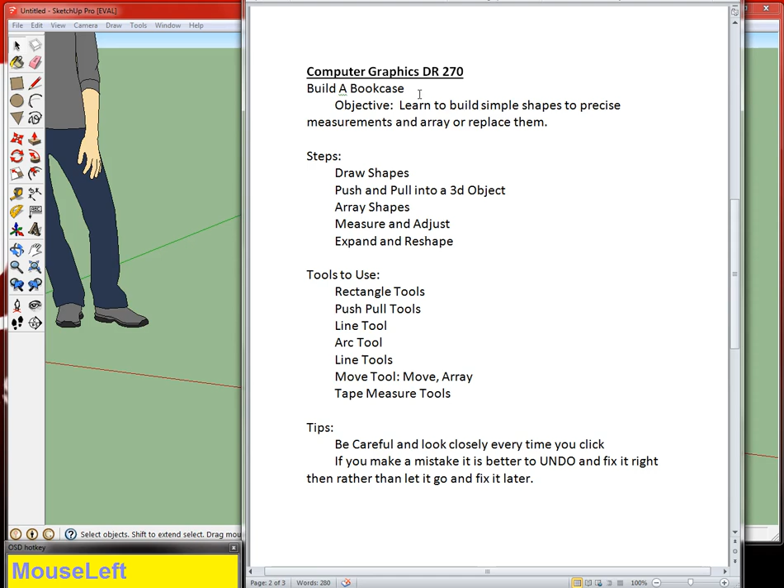So let's get started. You're going to start with the rectangle tool and you're going to make the base of the bookshelf from the Blythe Spirit Drafting, which is 2 foot 6 inches by 9 inches. We're going to use the push-pull tool to pull this to 7 feet tall. Okay? So now we have the basic shell of our bookshelf.

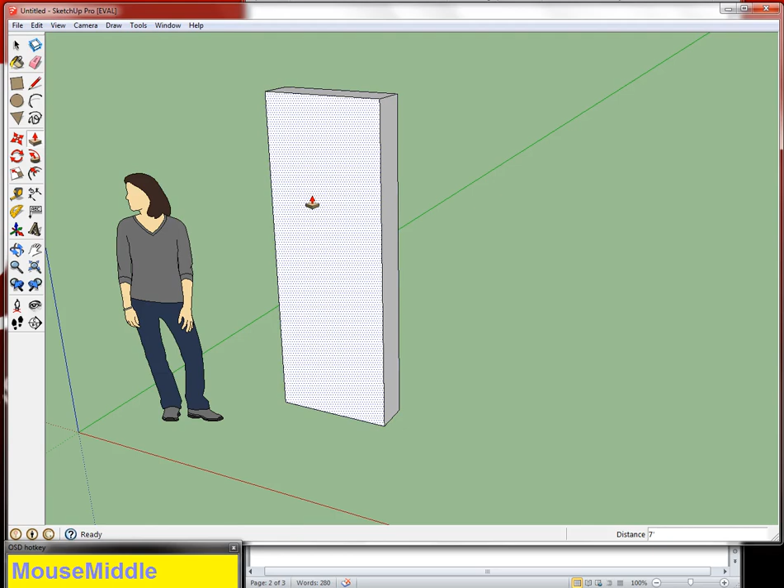We're going to take out one side. Grab your selection tool, and to do that also just tap the space bar. Select one click so that you're just selecting the surface. If you double click, oops, that was a triple. If you double click, you're gonna get the surface and the edges. If you single click, you'll get just the surface. Double, surface and edges. Triple, the surface, edges, and everything that geometry touches.

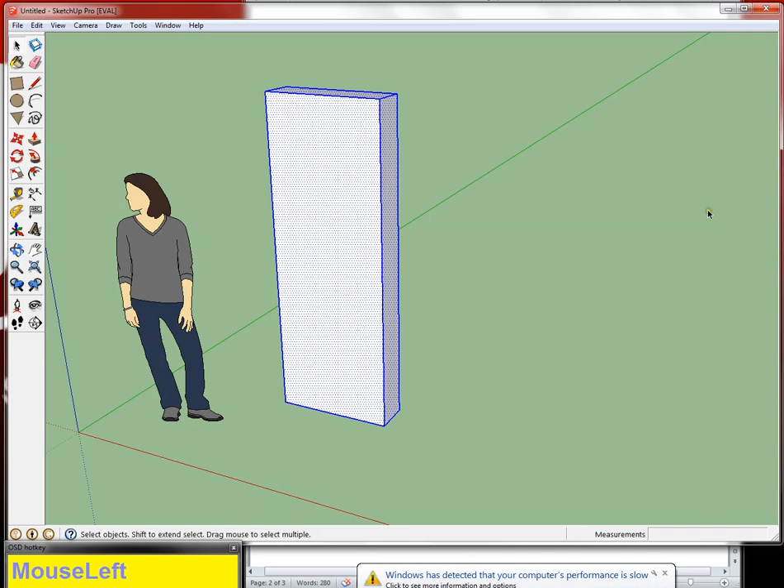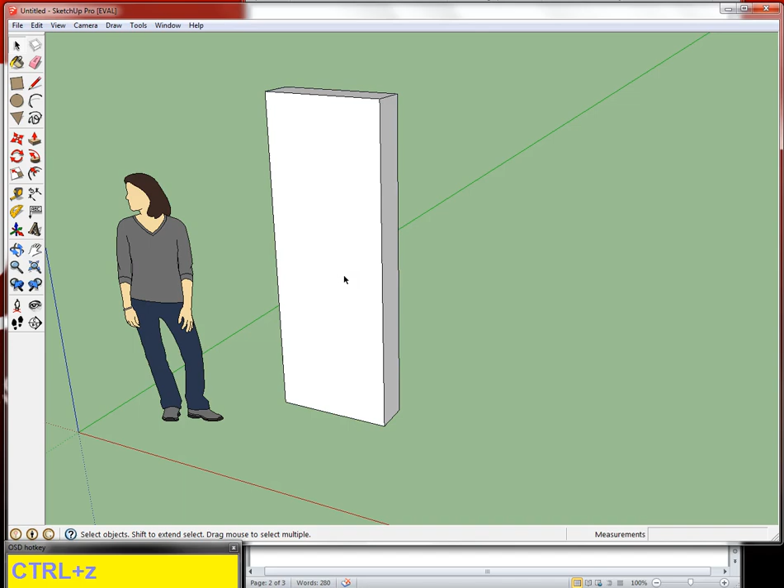That includes if you build 5 different objects that are touching it way over here, it's gonna select all of that, which you don't always want it to do. In order to keep things separated, we make them into components. So we're going to start doing that in this project. I want you to triple click on this unit now that one face is deleted. So I just clicked on one face and clicked the delete button. Now undo that. Make sure it's selected here and then click the delete button. You could also hit the eraser tool, but I usually use the delete button.

And then you're going to triple click on this whole unit, right click and say make component. Now you can name it. That is not really the most important part, and you can rename it later. So I'm not going to label any of mine in these example videos unless it's absolutely necessary. You want to glue to none. That's really important. That's the entire point of making things components. And if you change one of these items, they'll be changed for most of the time that you're using Sketchup, and sometimes they'll revert to normal settings, but usually it remembers everything you tell it. So you don't want to take that off, and you want to glance at it every once in a while and make sure it says glue to none.

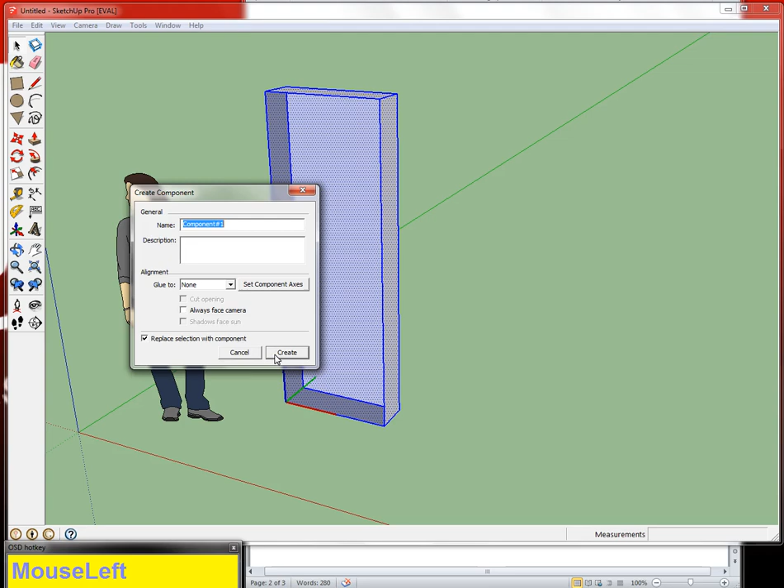You also want to make sure that this is checked. It says replace selection with component, which means that once we hit create, it's going to change all the surfaces we have right in front of us into a component. Otherwise, we would have to make a component, delete it, and then place the new thing directly in its place. We just don't want to have to go through all that. So we're going to click Create. Yay, now we have a component.

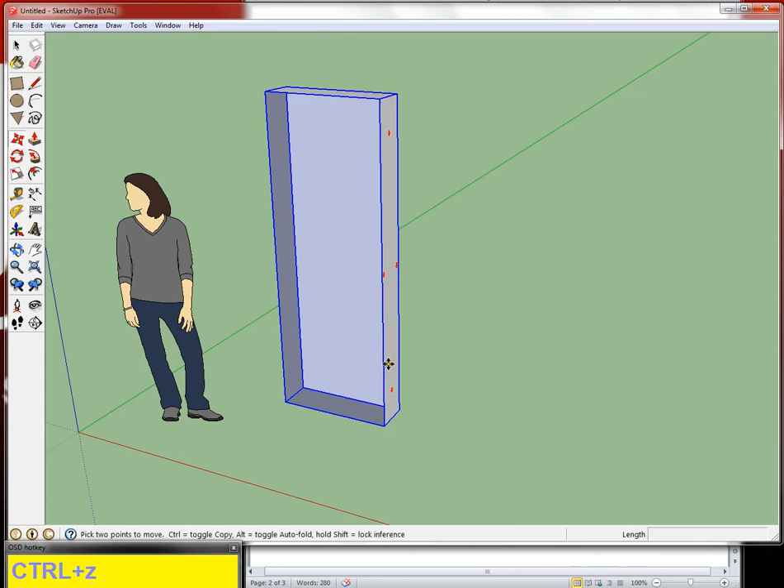Now you'll notice if I try and select it, I'm going to get the whole thing no matter what. But when I use the Move tool, I now have these rotatable handles that we talked about in class. So once it's a component, I have a lot more control over it with the Move tool. We're going to leave that alone and not move it very much in the near future.

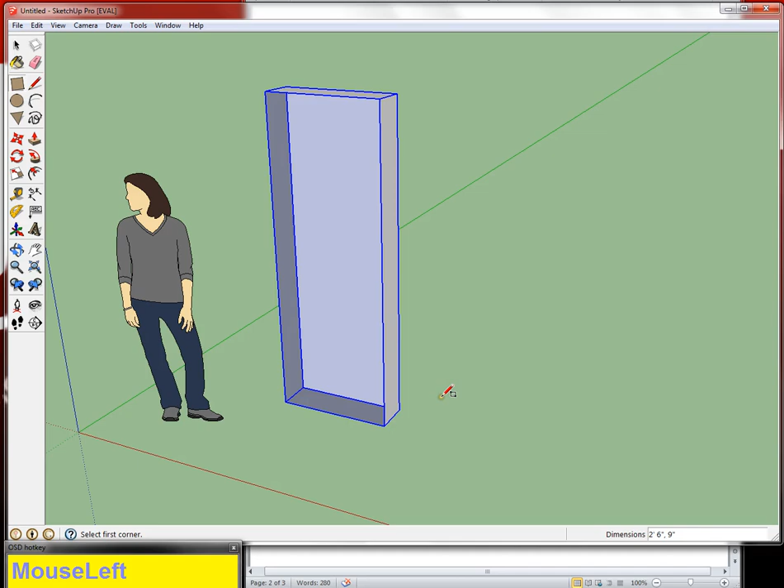I'm going to grab the rectangle tool and make another box right at the bottom. I am going to go from corner to corner inside the component, and see how they're purple circles. That means that they're an endpoint, but they're an endpoint in the component. So I'm going to click from that endpoint to this endpoint in order to make a rectangle, and you notice we can't really see anything. And that's because we made a rectangle right on top of another rectangle.

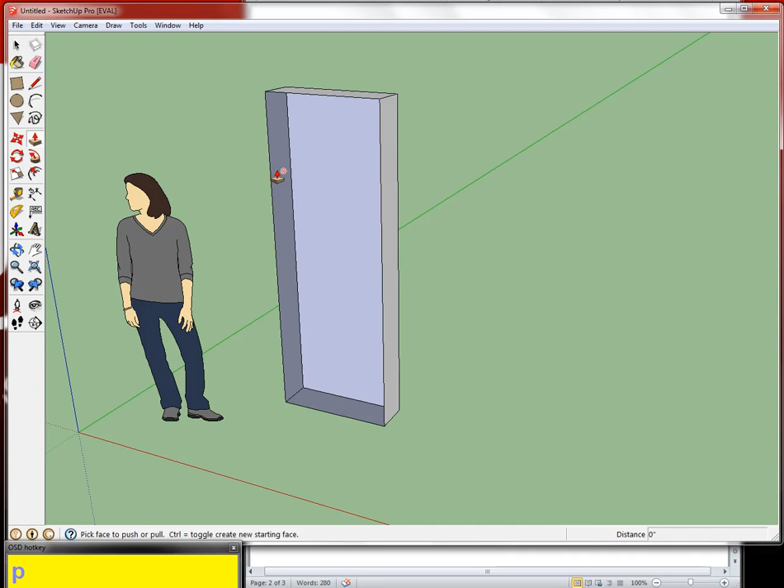But if I grab the push-pull tool, it's kind of grayed out, and that's because it's a selectable unit. I can't select any face inside this component because it's a component. And as you can see, SketchUp is telling me you can't alter that without being inside the component. And the component's like a group. So over here, you can see that the symbol is telling me, oh, there's nothing to alter, no big deal. But if I hover it over the bookcase, it's telling me, no, you can't push or pull that because you don't have access to it.

But I just made a new rectangle down here, which I can push or pull. So I'm going to click on it and pull it up and do 1 inch, 1, enter. And then I'm going to switch to my selection tool, triple click on that. And as you notice, it didn't select the bookcase. That's because the bookcase is a component and it doesn't see it as something it can select. Right click, make a component. Create.

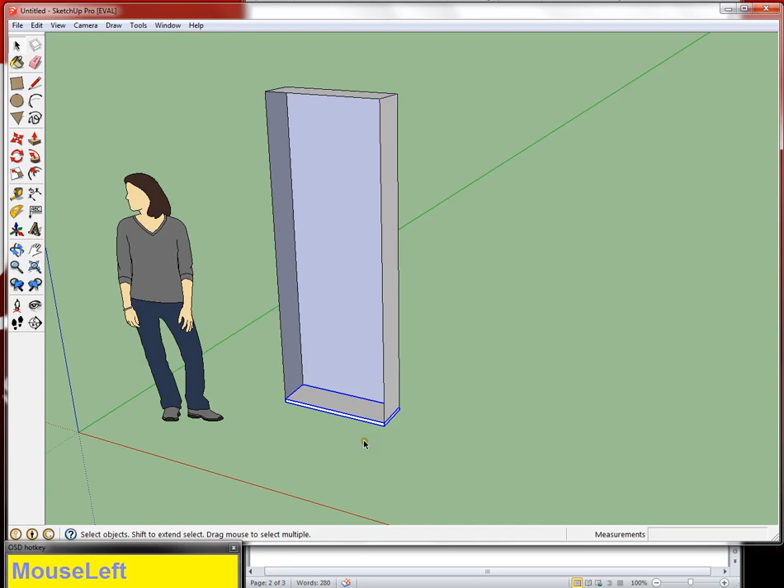I'm going to grab my Move tool and I'm going to grab the very bottom corner of this item. I'm going to grab it, pull it up. I'm going to tap the Control key in order to tell SketchUp that I want it to make a copy. Then I'm going to zoom out and I'm going to put this copy directly on top of the bookcase. Now I'm not going to leave it there. I'm going to end up deleting it, but I'm going to put it up there for now.

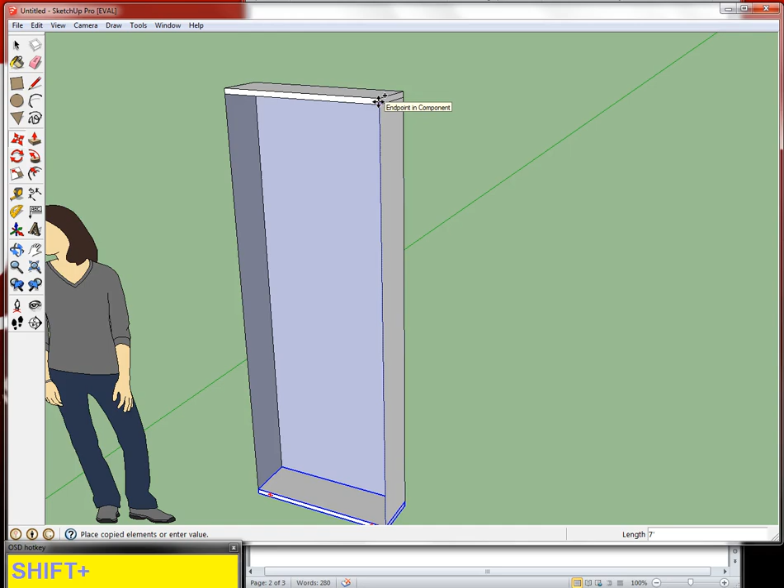I'm going to click. Before I click on anything else, I am going to tell SketchUp that between this original and this copy, I want you to divide it evenly 8 times. And there it goes. All I had to do was type divide 8 and enter, and it creates all those components evenly distributed between the bottom and the top. Now I could do this without making the shelves into a component. I only did that so that I didn't have to worry about them sticking to anything else.

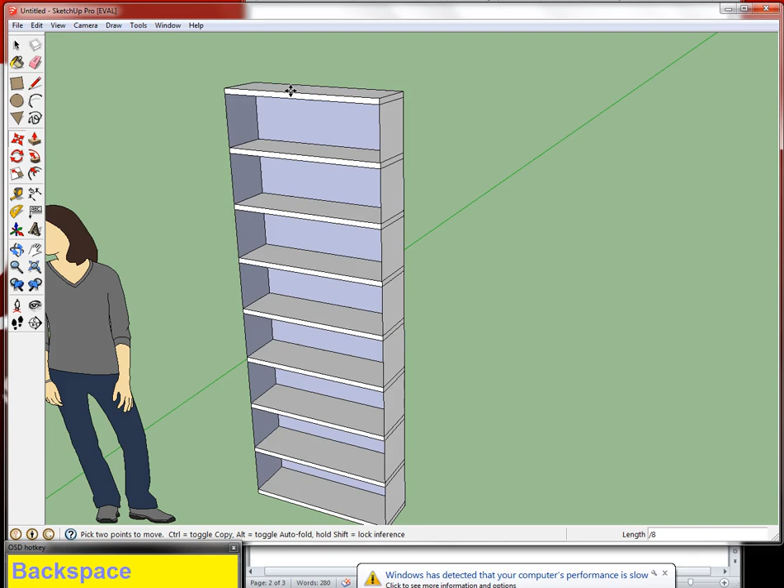I'm also about to build a wall in front of this bookcase, and I don't want that sticking to the shelves either. So I'm going to grab my selection tool, select this top shelf, and delete it with the delete key. Okay, so now I'm going to create a wall around this, and that wall should be 2'6" plus 9 on each side. So there is a 9-inch frame here and here, and then the total wall height is 11 feet.

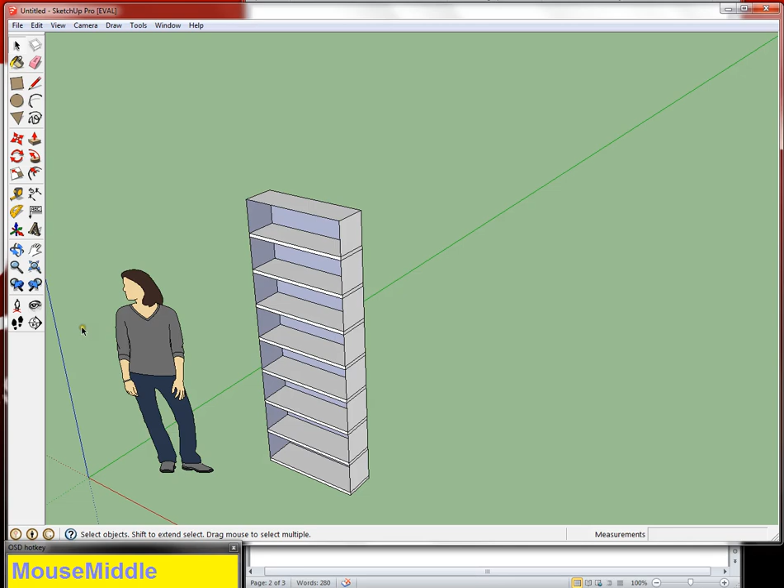So what that means for me is I could do a couple things. I could make a small rectangle out here, and I'm going to make this wall 3 inches deep so that it's not too small to really see. So I could make the wall a couple different ways. I could come over here and make a square that is 9 inches by 3 inches. Come over here and do the same thing. 9 inches by 3 inches. Grab the push-pull tool and pull that up to the top of the bookcase.

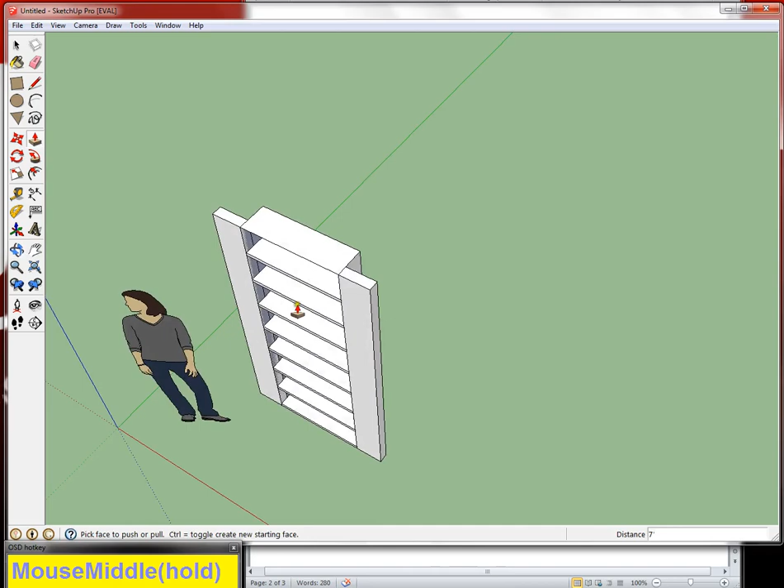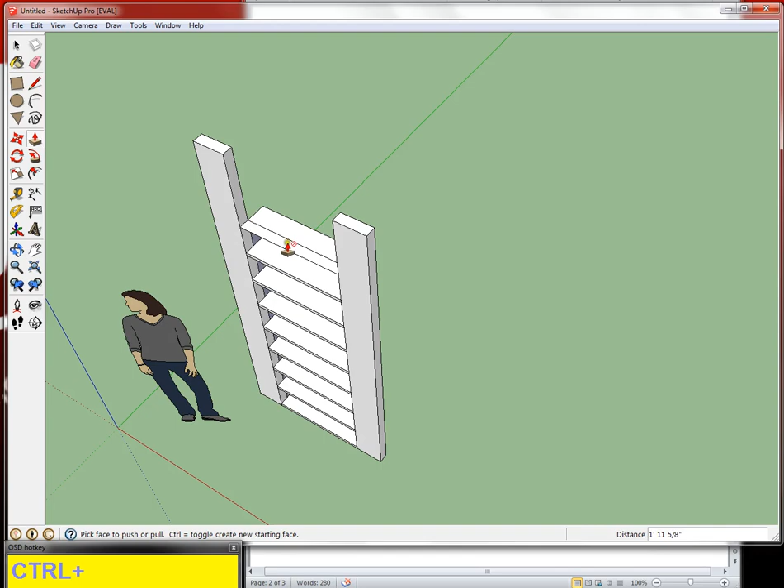I could grab the line tool, complete that, and the push-pull tool. Ooh. Since that line is drawn on a component piece, it's not actually going to give me a new surface to cut with just that line. So I need to use the rectangle tool to make a new rectangle there.

But once I do, if I even these 3 things out, I can take the eraser tool, and as long as I'm sure that these items are at the same height, I can connect them together. I can meld them into one object. And now when I grab push-pull, I can move this whole wall up and down to make it the total height that I need it to be.

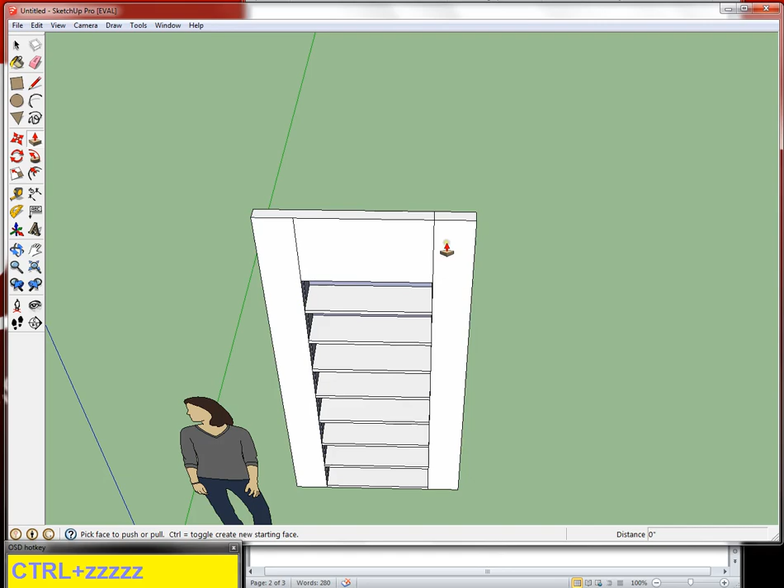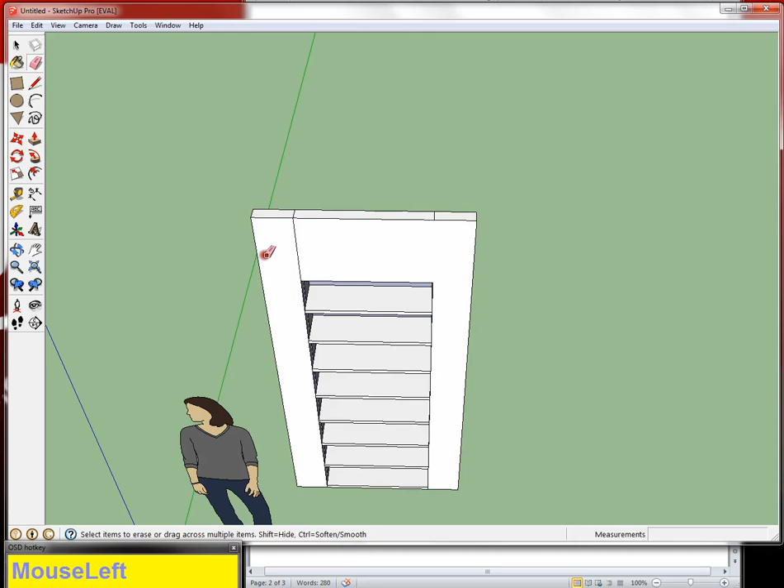Now, I need to make sure that they're all the same height though, because if I start deleting that, I'm going to get funny stuff happening. So when I push and pull these to make sure they're at the right height, I'm going to make sure that I inference them, and even if they look like they're at the right height, I make sure to inference each and every one of those surfaces so that they're the exact same height.

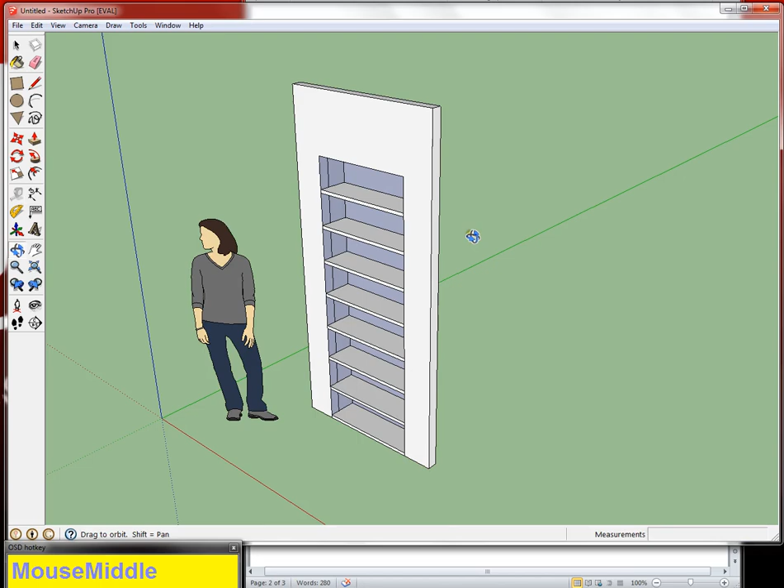Then I'm going to grab the push-pull tool and pull it so that it is at 11 feet. Now, I'm not quite sure where 11 feet is, so there's a couple things I can do. I can grab the bottom and pull up a line and go 11 feet. Push-pull tool, grab the surface of the top and bring it to that line, and there my wall's at 11 feet. I can measure a different way.

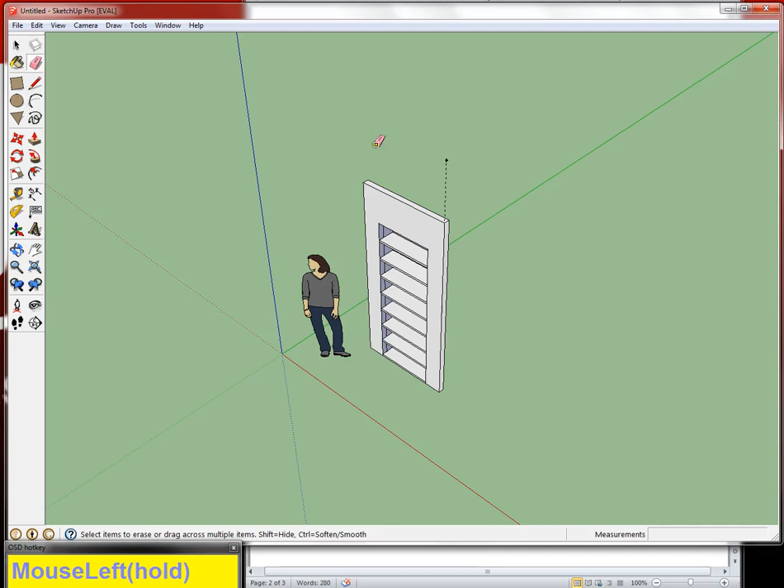I can grab the bottom corner here and pull straight up and type in 11 feet, and then that will also give me a point at the top of my guideline that's in the right place. So if I didn't have this line right here, I could still grab the push-pull tool, grab that surface, and inference the very top of that corner. Click to finish, and now I know that this wall is 11 feet tall.

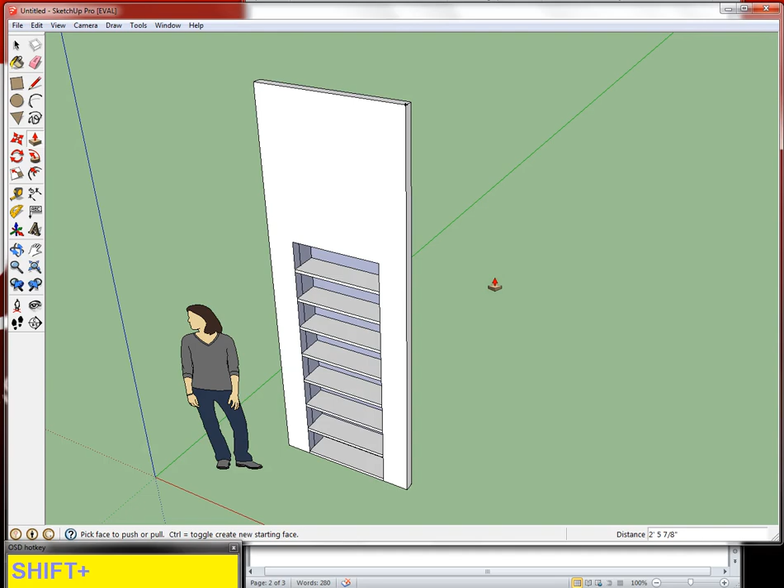Now there's another way that we can do this, which involves expanding the surface of the front of that component. And we went over that way in class, but I'm going to do it for you again. So I'm just going to Control Z until my walls disappear and I'm back at the component that I had before. I am going to grab the rectangle tool and I'm going to recover the front of that bookcase so that I can expand it.

And right down here I can see that that box is 2 foot 6 inches and 7 feet. So I'm going to calculate with math, and I'm going to see that 2 foot 6 plus 9 is 3 foot 3, so I'm going to make a 3 foot 3 inch rectangle by 7 feet, and I'm going to make sure that it's going to be made in this direction, okay? Oh, 3 foot 3 inches by 7 feet.

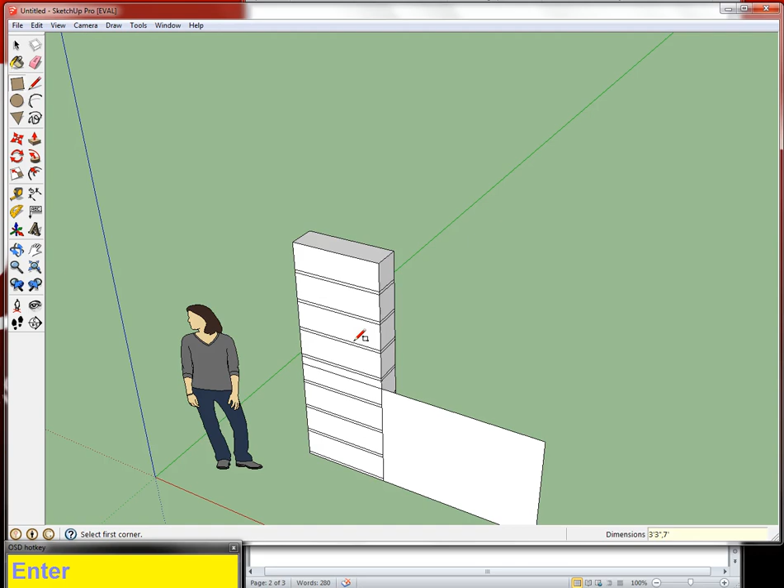That is not the direction that I wanted it to be made in. So I'm going to try again and flip those measurements. 7 feet, comma, 3 foot 3 inches. And there we go. I'm going to do it again this way. I'm going to do that trick where I make a really skinny rectangle so I can see which way is which. So the height is first this time. So 7 foot, comma, 3 foot 3. There we go. And now I'm going to make a rectangle this big.

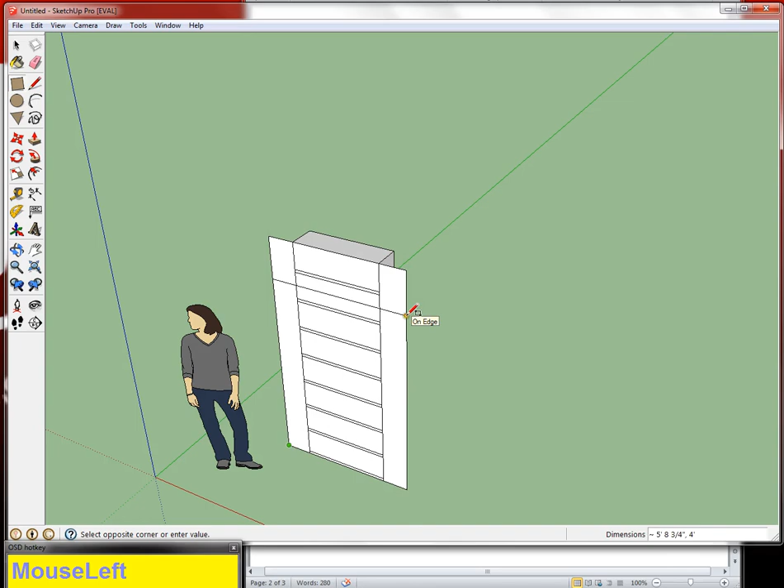So now I know that my wall is 4 feet wide, and I have the bottom corner in the right place, I'm going to make a 4 foot wide by 11 foot rectangle. So I'm going to do 11 feet by 4 feet, enter, make it big. I'm going to grab my push-pull tool, grab my eraser tool and make that all one surface. So that's all one surface. I'm going to grab it, push it back 3 inches.

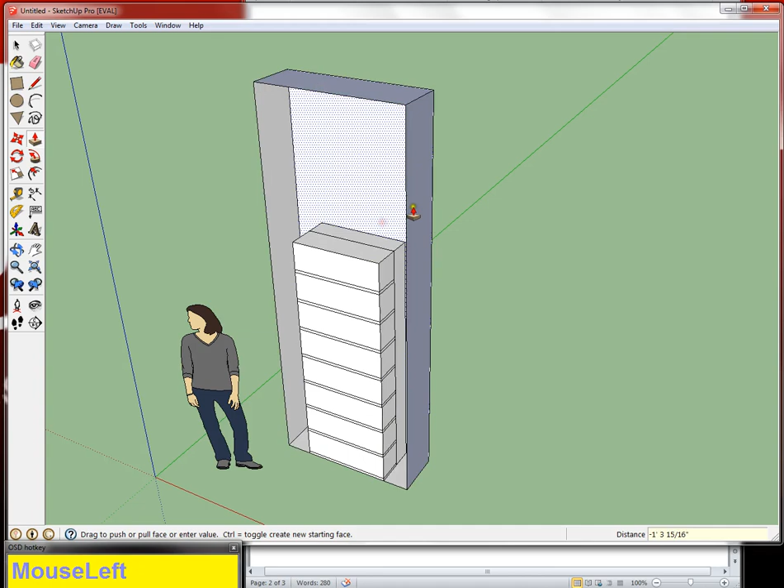Oops. I said push it back 3 inches. Hello. All right, there we go. And now there's an empty surface on the bottom. I can make SketchUp redraw that surface by covering one whole side with a line tool again. And that just tells SketchUp, hey, go ahead and fill in that surface. I'm going to grab my selection tool and remove that original wall piece that I made.

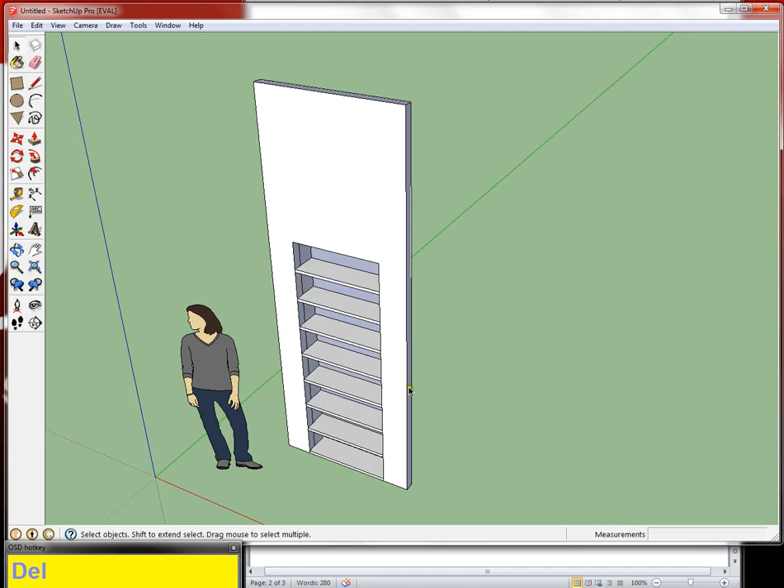And there we go. That is a complete bookshelf again. The exact same size. I'm going to grab my tape measure tool to show you that it's 11 by 4, and the bookcase itself is 7 by 2 foot 6 by 9. Okay, and that is it for building a bookshelf.